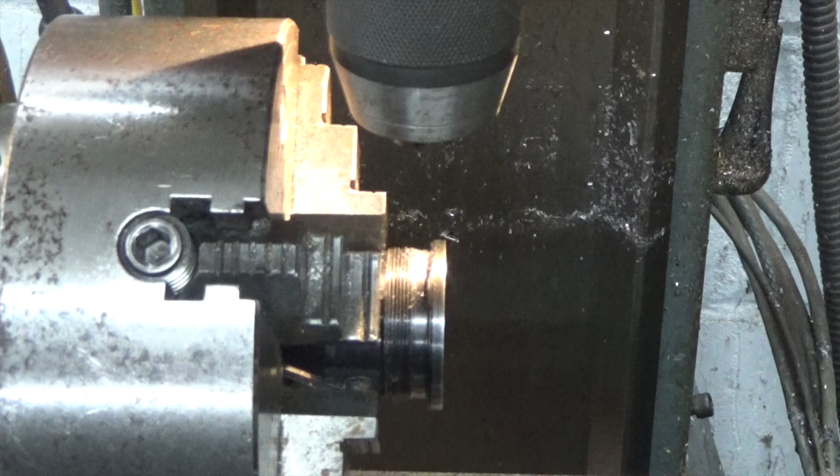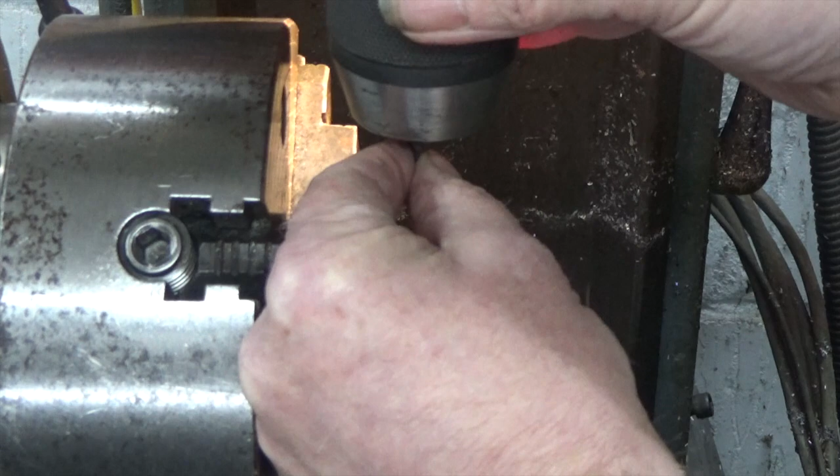A problem with all hobby-sized milling machines seems to be that there isn't very much Z-height. If you have a fairly tall fixture, like a rotary axis, this can become quite limiting. Here we see that I can barely fit a 3mm drill into the chuck, and this is partly because the drill chuck is rather long. I used to have a slightly shorter one, but this happened to it.

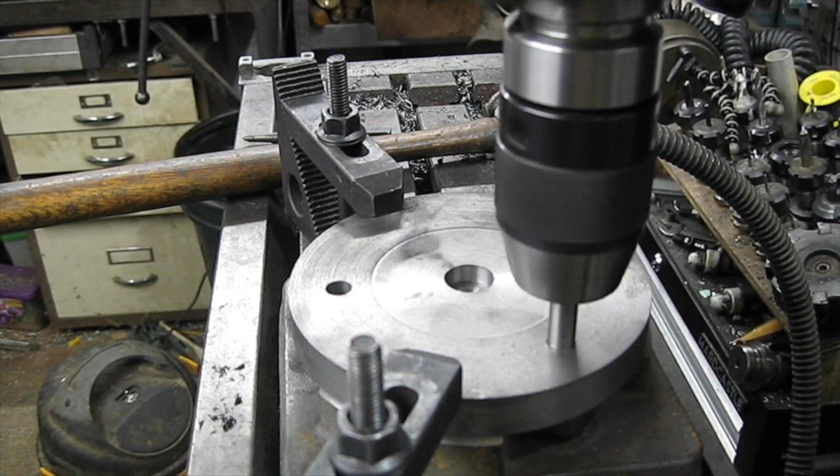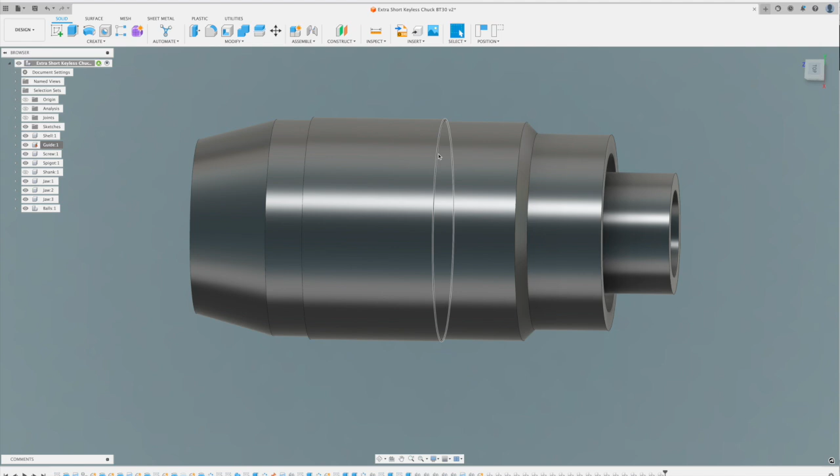I sourced a chuck for £14 and a shell mill arbor for £17 from eBay and shopapp.co.uk respectively. This is a 3D model I used to work out how to modify the parts. This is the internal drill arbor taper that is intended for attaching a standard shank. It isn't immediately obvious because of the way that they fit together, but the end cap unscrews.

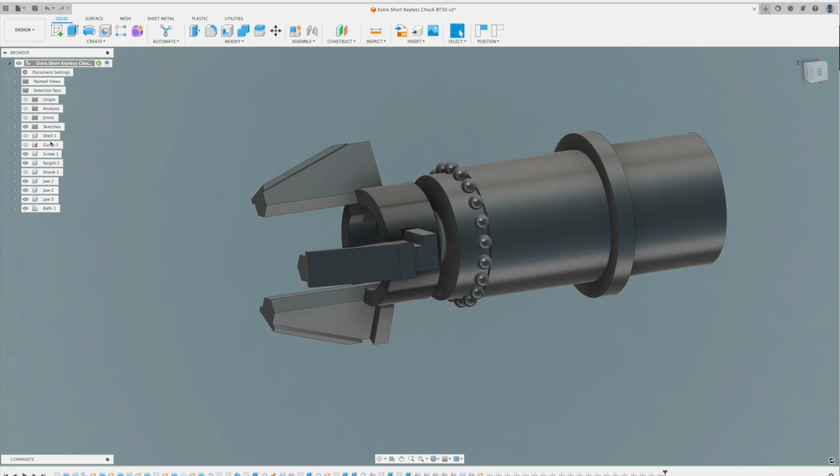I held the end cap in the lathe chuck and used a hook spanner to remove it. The jaws hook into an actuator with a left-hand thread, and holes in the guide body allow clearance for the hooks.

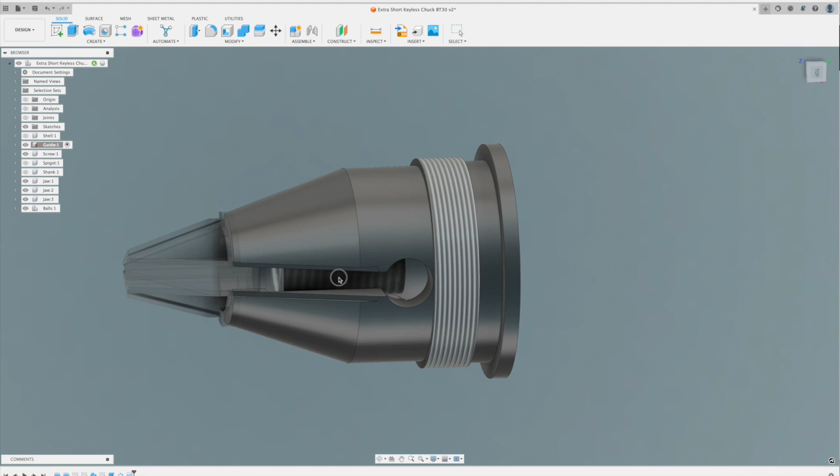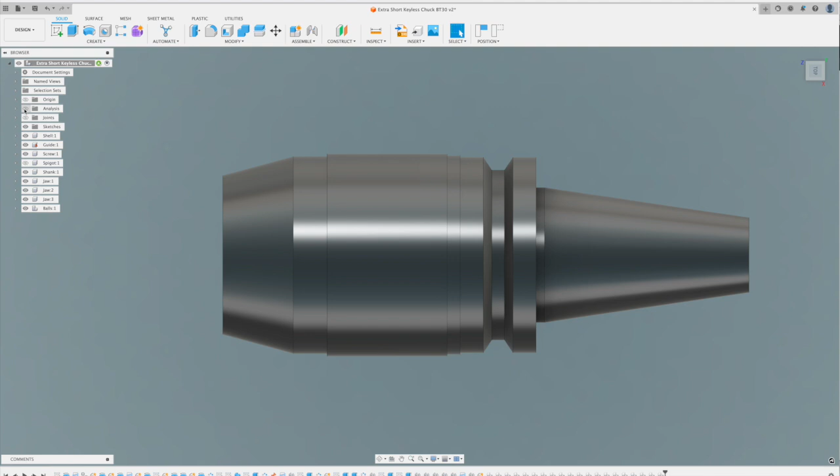I cut off as much of the guide body as I thought I could get away with, and modelled up the modifications required to the shell mill arbor. The original way that the drill body was retained on the shank was with a threaded ring and ball bearings. I have removed the possibility of using the same method, so the parts are retained by the actual ball bearings. These bearings are fed in through a drilled hole that I didn't bother to model.

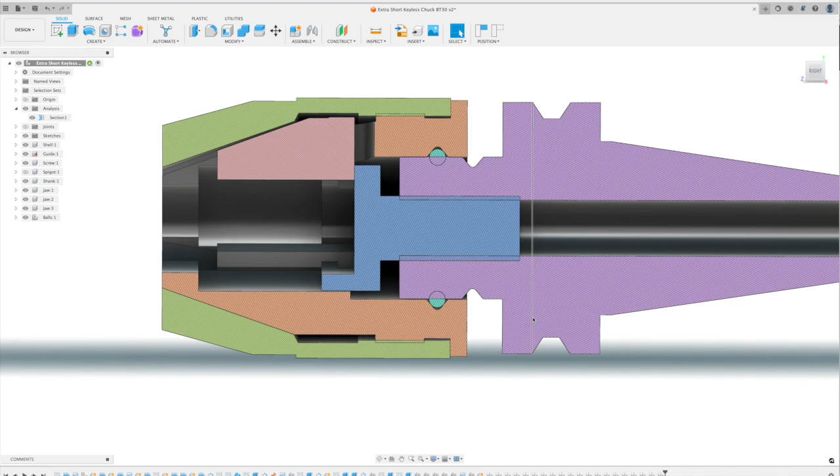I started off by machining the guide body after carefully centering it in the 4-jaw chuck. I used the original arbor piece to provide tailstock support during the initial turning.

I decided that coolant was needed, but then found the nozzle was blocked.

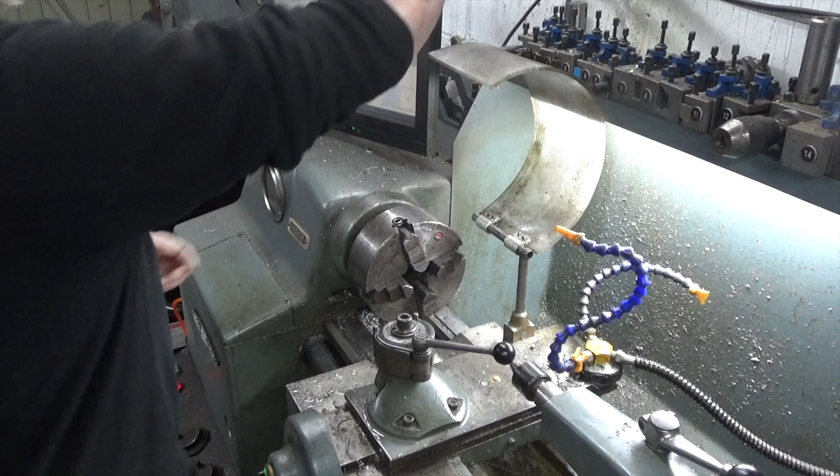I have a special sleeve to hold BT30 spindle tooling in the lathe spindle. There is a dot mark that should always align with the 1 mark on the spindle.

The spindle on this lathe has an electromagnetic brake. We won't need the drive dogs.

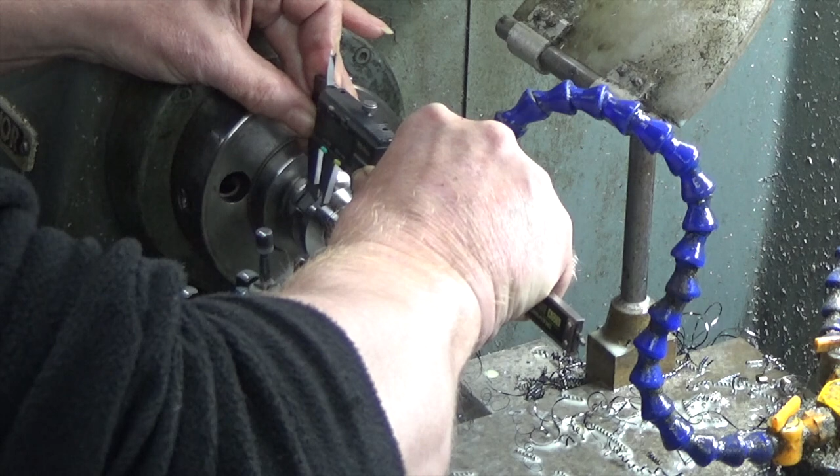I decided I could steal a bit more length and move the flange back another couple of millimetres.

Still with the bird's nesting problem.

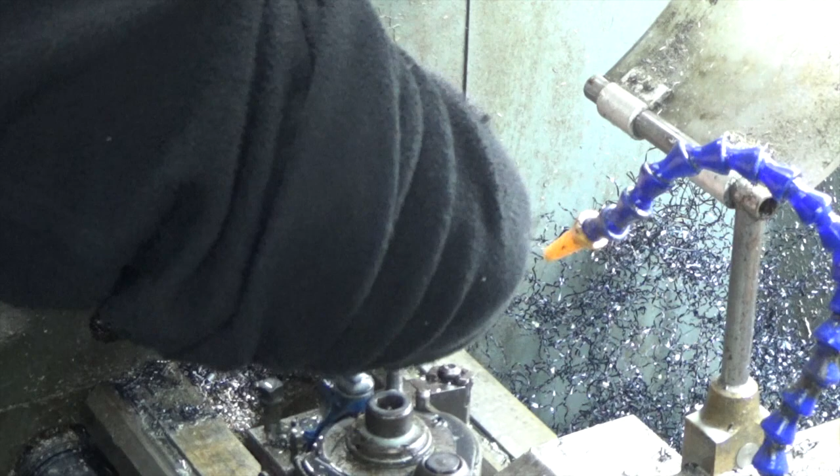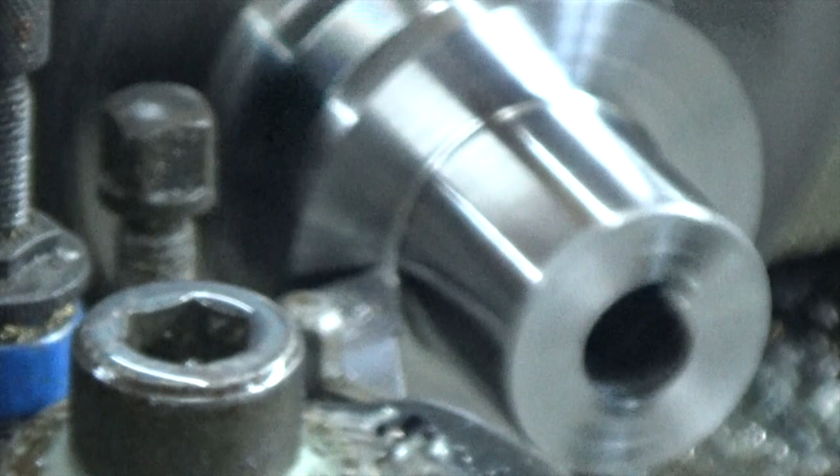Out of focus relief groove cut by hand wheels.

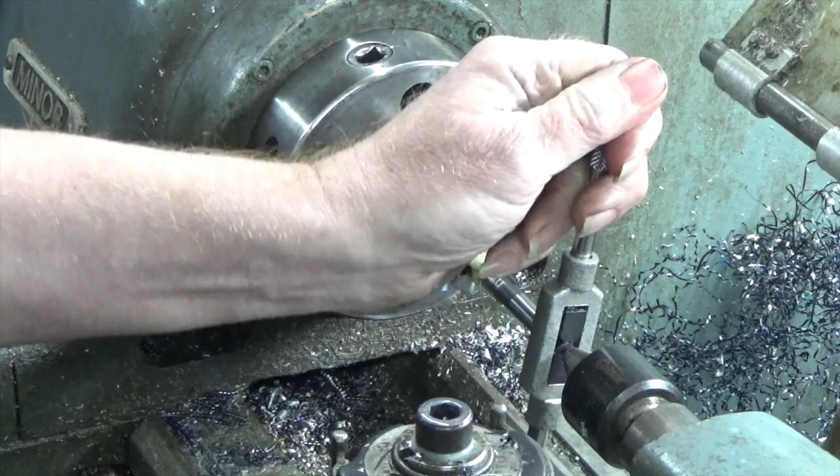I used the lathe to start the tap square. I finished the tapping by hand, and it was a real struggle. I suggest you buy a really good quality tap if you try this.

Trial assembly showed that more space was needed for the actuator head, so the spigot was shortened. So we lose the ugly hole remnants at least.

Before giving up and grinding a special tool out of a broken carbide end mill.

I checked the alignment with a 2-micron indicator, as it is fairly critical. The internal groove was cut by hand and checked with a ball in the groove and an internal micrometer.

But this wasn't filmed, consequently. The tool was reversed in the holder and the groove was iteratively aligned with the drill mark by eye.

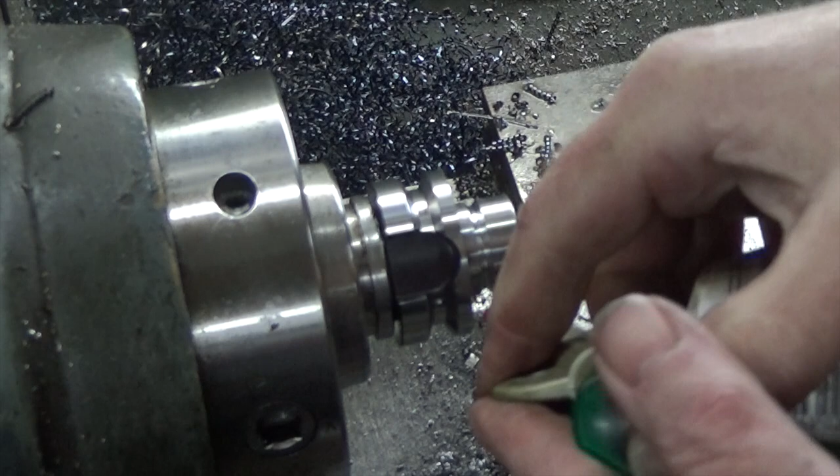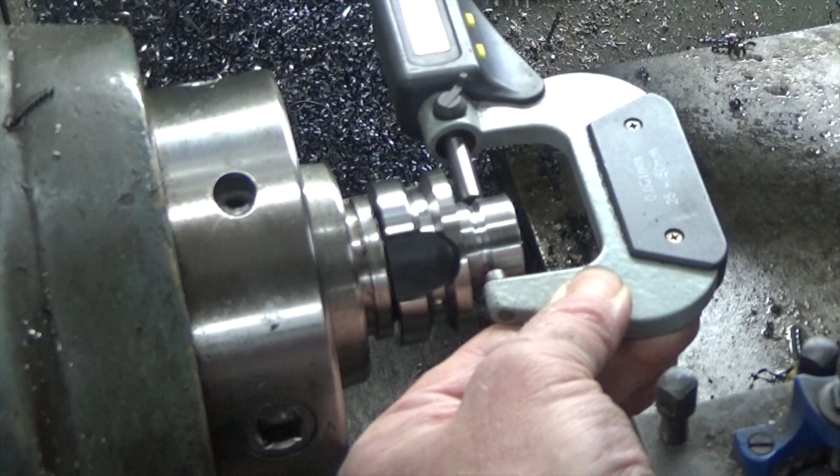A blob of grease holds the ball bearing in place to be measured with a micrometer, and then a test fit with a single bearing, so that it is easy to dismantle.

And then it's time for the final assembly.

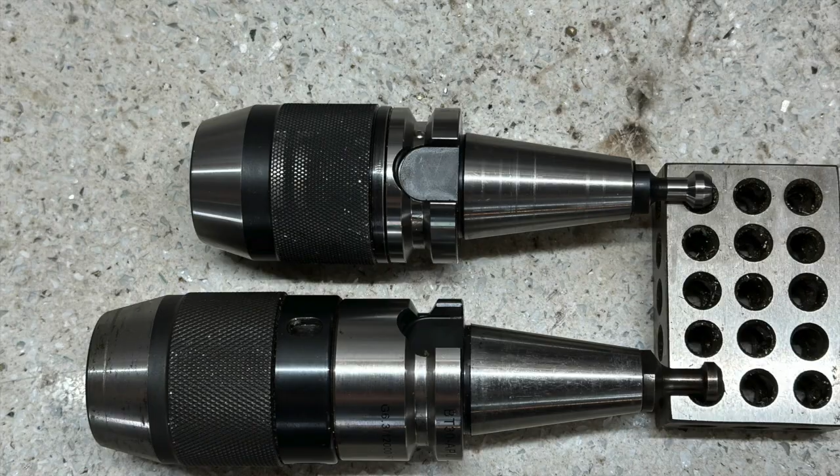But with the old chuck, I can't get the drill in, whereas with the new chuck, I can.